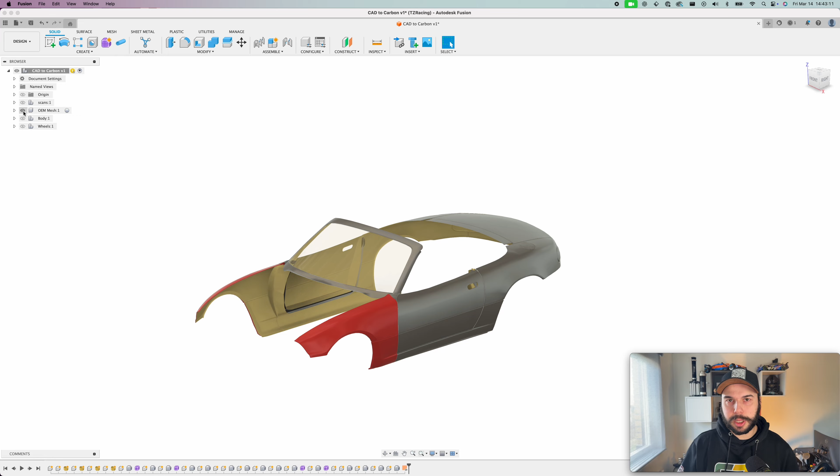But yes, the other option is you go out there and 3D scan yourself. We use a relatively budget scanner called an Einstar. It's honestly a great option if you're like us getting started and you don't have a big budget. You can still get very good scans, and it's a relatively affordable tool to have.

So we can see here I went out there and scanned the actual car, and we can validate against the model to see if everything fits. Here, for instance, I needed the cage to make sure that the fastback would fit when I modeled it, and that's when a generic 3D model you found online wouldn't be good enough. The cage in my car was custom built, so I needed the actual scan for my actual cage to make sure that it would fit.

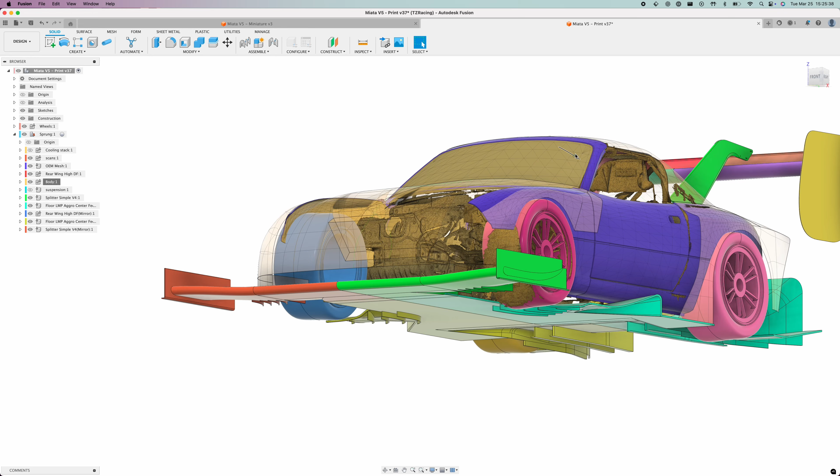So here you can see there's a little bit more in there than just the cage. It has the engine, it has the hood, and you can see that kind of lines up with the original scan, even though there isn't that much left of the car.

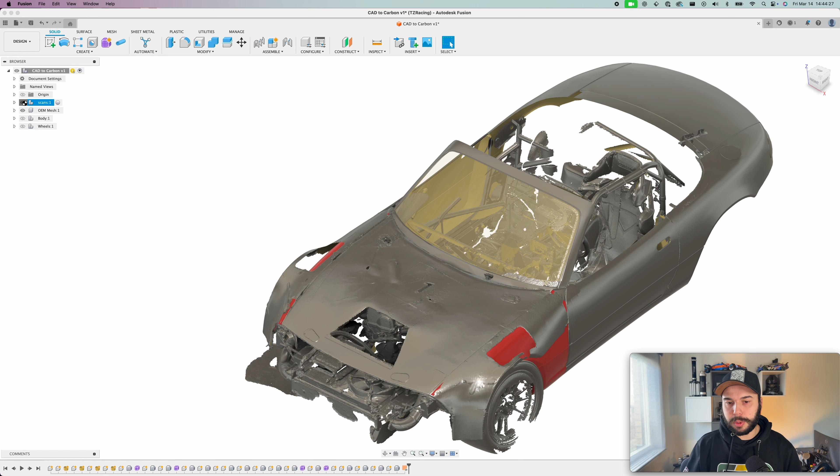But for today, for this exercise, we're actually just going to work with the model that I found online. We're going to be working on the rear fender, so we don't really need the cage or these other details. This scan was also a little bit too heavy - that's something to keep in mind. If you're scanning yourself, you might want to turn down the resolution if you don't really need that much, because it makes it more difficult to work in Fusion.

Let's hide that scan and just go back to the model that I found online. As a reference, I have some of the stuff that I had already modeled here, and you can see that this is the quarter panel that we're going to be working on.

Full disclosure, this isn't going to be a full comprehensive tutorial on how to do form modeling in Fusion. There are already great videos about that on YouTube, and I'm happy to link some of them below - that's how I learned it, and I can share the videos I found particularly useful. This is more of an overview of the end-to-end process with some tips and tricks for every step of the way, and we can obviously add more resources for each of the steps.

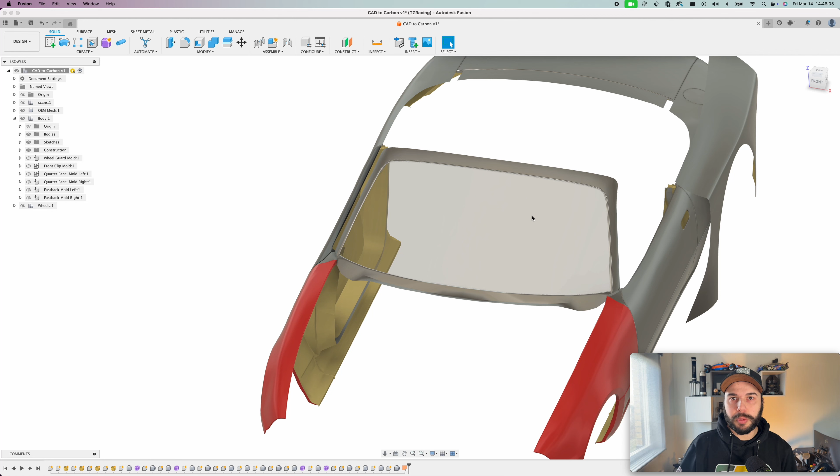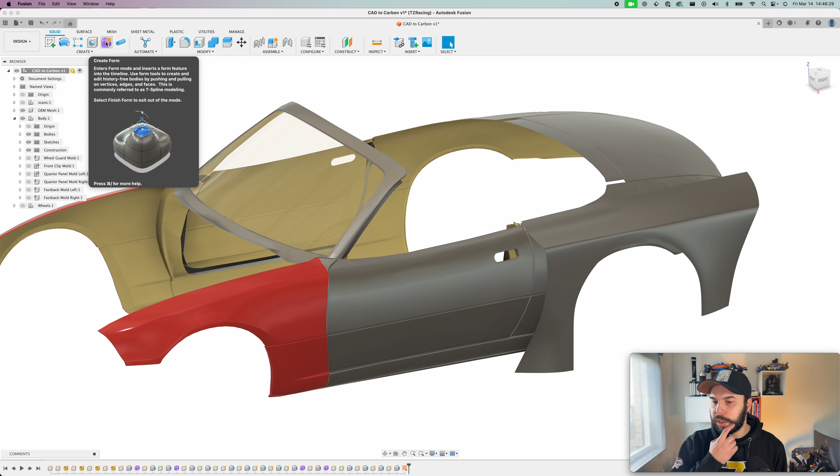So yes, this is the fender. We're gonna go and create, just give you kind of a starting point and some tips and tricks. So let's say we don't hide this for now, and we want to start a new version of the fender. So what we need to do is we need to go up here and use the form tool, and we need to click create form.

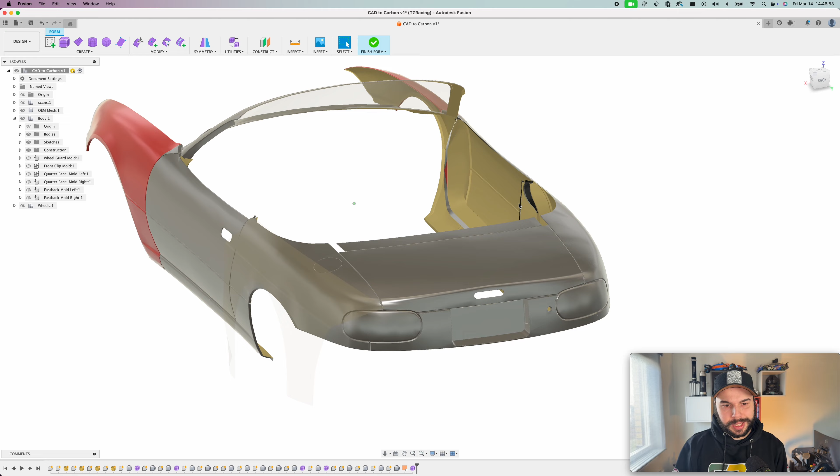But you're going to see what happens when we do that is the other fender just kind of vanishes. And that can be tricky if, let's say we're making another fender, we're making the fastback, and we wanted it to line perfectly with the fender. So that would be quite tricky, because even though we have kind of a shadow of it, it's very hard to see it properly. One trick for that is I'll just undo the new form.

Here we're working with the timeline mode in Fusion, which you can see every step here. If you haven't used it before, this is a great tool, especially if you're doing sketches. So let's say you model a plate and you make all the holes in that plate 6 millimeters. Then you go to the car and you realize that you actually need 8 millimeter holes, because whatever you're bolting to the car needs 8 millimeter bolts.

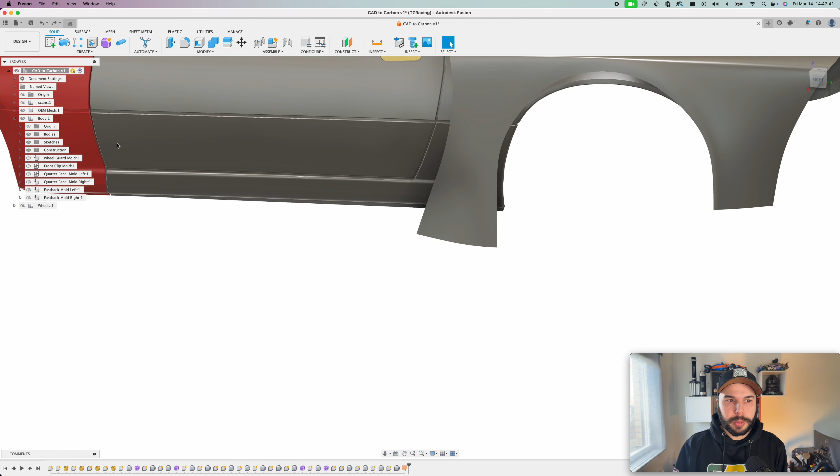So you can kind of roll back, edit your sketch, and it automatically reapplies everything else. So if you build other things based on that original sketch, things will just be updated to the new sizes. So that's awesome. But when you're working with forms, it's not always an advantage.

So personally, I find it easier to right click on the name of the project and then just click do not capture design history. It's going to tell you that you're going to lose your history, which is okay. So sometimes I'll have multiple files where I can kind of move things back and forth. So in one I have the design history, the other one I don't. So for this case, let's just delete it.

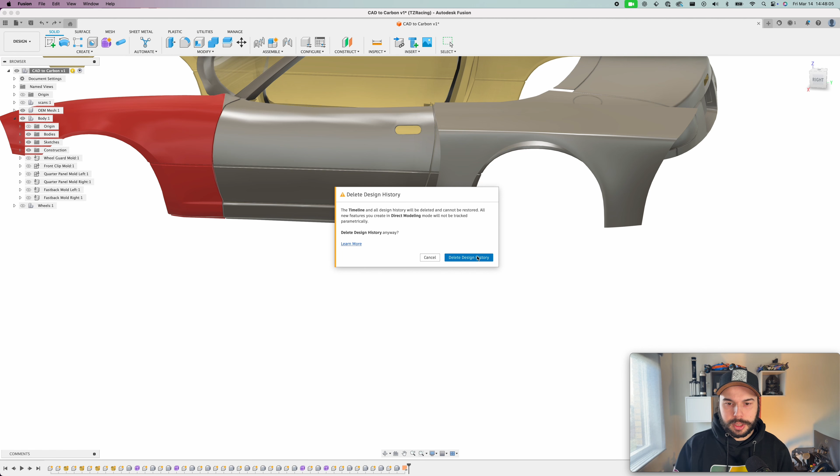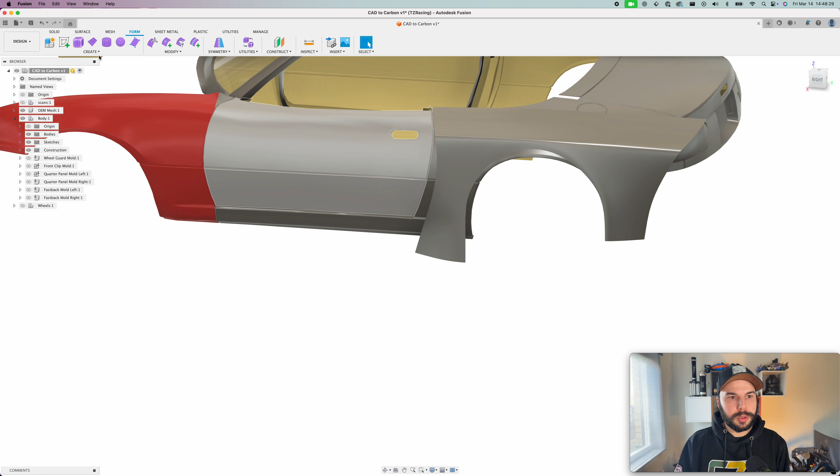And now you're going to see that we no longer have the create form button, but instead we just have the form tab, which allows us to use the form tools directly from the top level context. And here we can decide how we want to get started in our fender. And this one is obviously still visible. An easy way to start is with a cylinder.

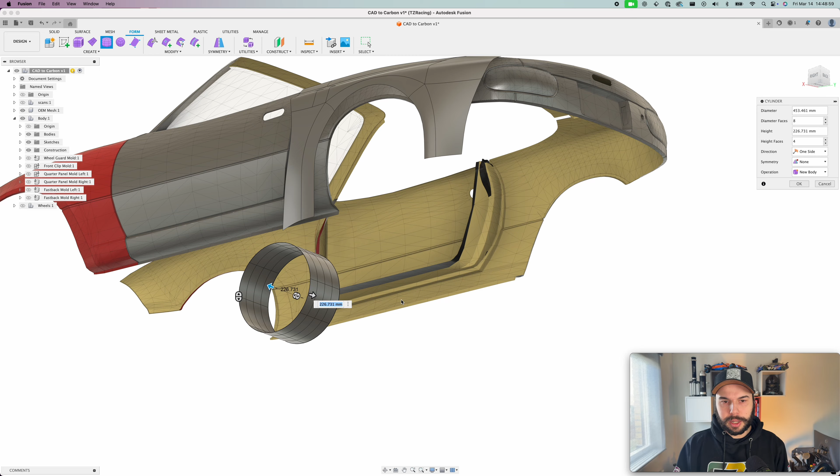So we can just go here and right click on the plane we want it to be, and then we just kind of make a circle. The size here doesn't really matter for now, and you can see that's created this cylinder. Oh wait, so right now I have the edges hidden, which is Ctrl 4. If you want to make them visible again, you just press Ctrl 6. So that helps. So we can see that now we have 4 divisions in that direction.

So we can just go here, make just 1, and we keep 8 in the other direction, which is fine. We can change the height, it doesn't really matter here. We can make like 100 or something like that. The diameter might be easier to start with the diameter of our tires plus some margin. So the tires that we're running are 650 diameter. It's a 280 by 650 slick.

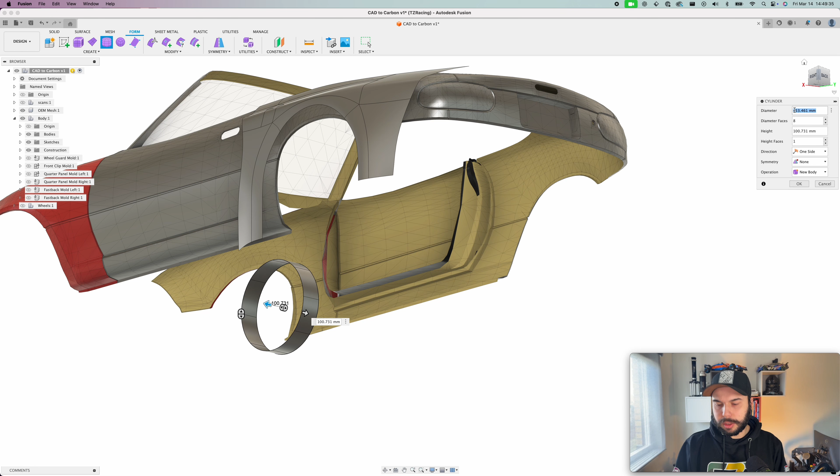So if we add, let's say, 1 inch, that's 25 mil in each direction. So the diameter is now going to be 700. So we can just make that. Cool. So here, if we want to work with forms, then we need to use the edit form button. So now we can just select it.

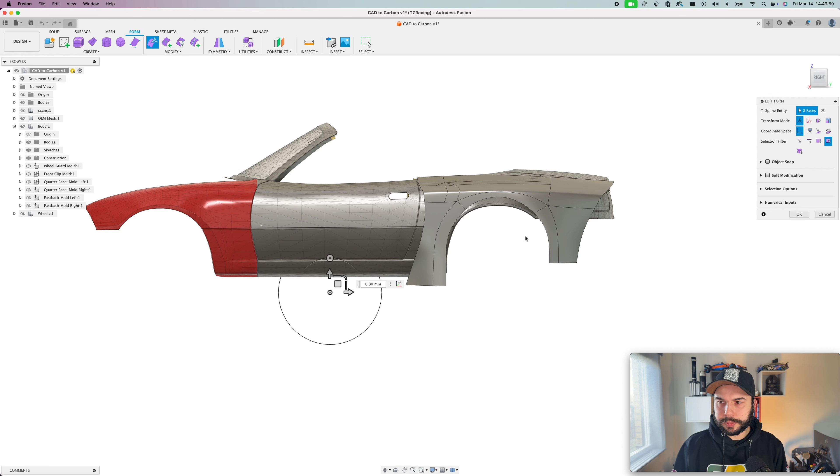If you double click on a face, you select that whole body, which is useful when you just want to drag things around. And I also find it easier to work with the planar face. So if you just click right there, and then you can drag it here, and it should be fairly close to the size that we already have. And then we can also look from the top and just move it back here.

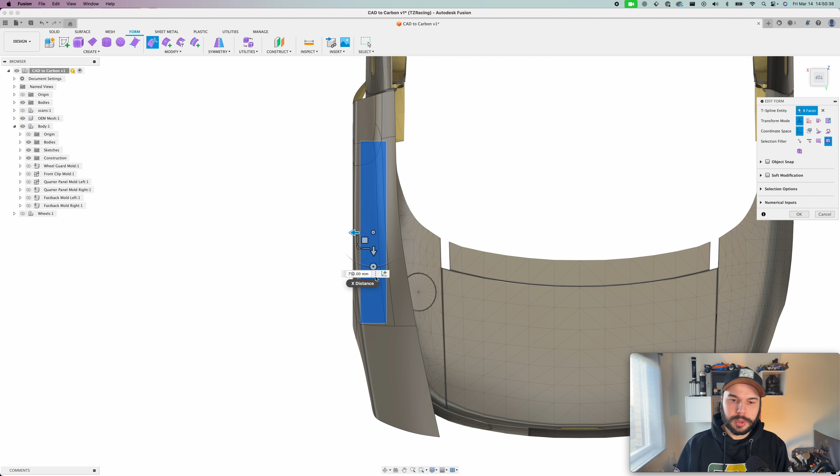One trick that I think is also helpful is to be very clear, like usually move when you're looking straight down or side, and then try and move it one direction at a time. You can also move 2, but depending on what you're doing, it might be easier to do 1 by 1. And Fusion will also move in steps, so you can just edit the number by hand until you're close enough to what you want. So here we are 780, that's close enough. Let's see.

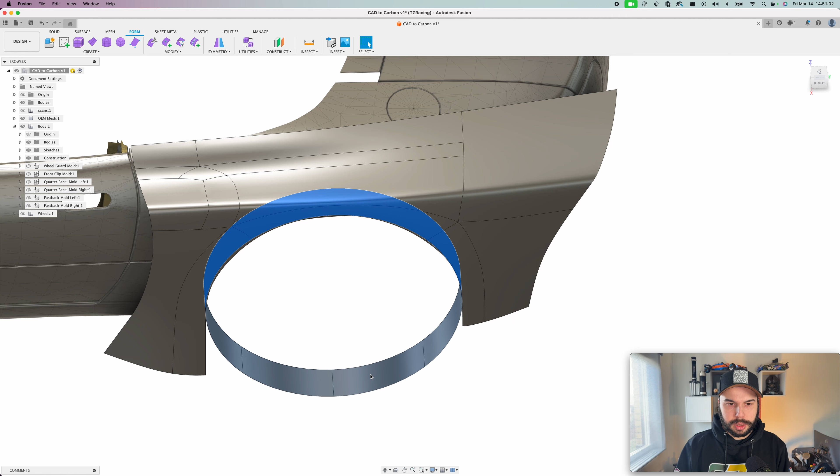Yeah, we didn't quite nail the position of the radius, so since it's still selected, we can just click edit form again, and here again it makes more sense to move in 2 planes, right? So here we'll be moving in Y and Z.

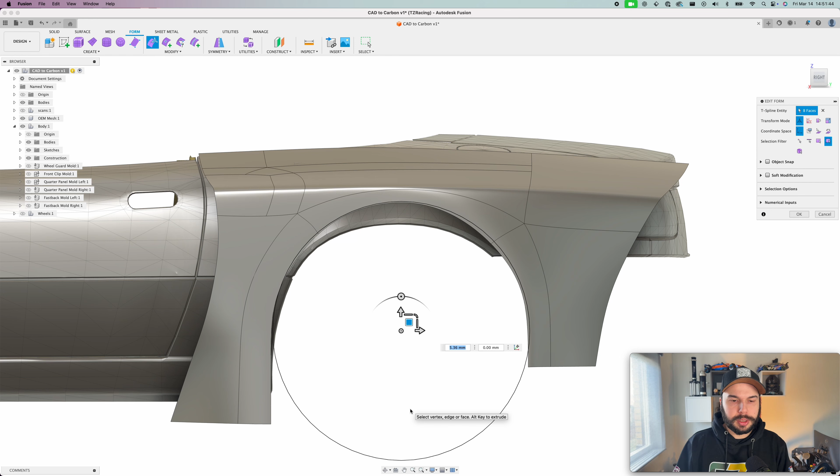Obviously we're not going to recreate the full fender, so it doesn't really matter. We can just put it in a place that looks close enough, and we can also see that the fender actually isn't fully round. The reason for that is when you have multiple panels, Fusion kind of pulls things around. We're going to look a little bit more in a second, but yeah, it's one of the small challenges that you're going to have to learn to deal with. But these are very small deviations, and it's not going to be noticeable with the full car.

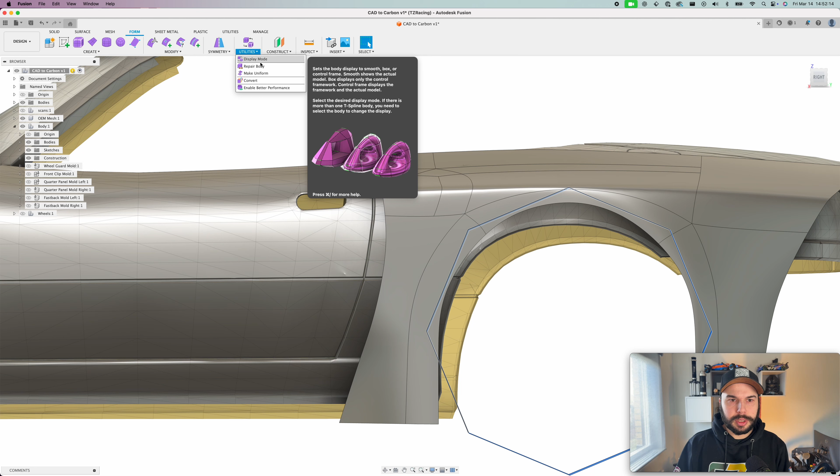So yeah, now you can see that this obviously is a circle, right? It's perfectly round. And that's what in Fusion, in the form tools, is called smooth display. We can also change it to box display. So you can press Ctrl+1 to go to box display, or you can go under utilities, display mode. And then here you can see this is box display, then you have control frame, and then finally you have the smooth display, which is what we were using before, or the shortcut is Ctrl+1, 2, and 3.

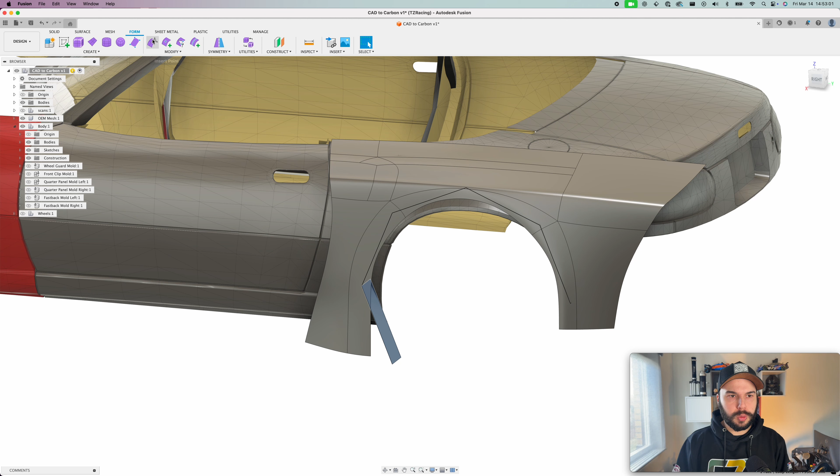So nice. Obviously our fenders are round. At some point they need to come straight down. So we can just go and delete some of these faces. So we can delete this one and this one. And yeah, let's delete this one too. Ooh. Here there's a couple ways to deal with that one. We can either delete it or we can leave it here and then just move those vertices. Yeah, so we can move these ones.

Another nice trick is you can move your anchor point, or your pivot, I guess. You can just go and move it to that edge there, or that vertex, and you press down, so that's where you want it. And then you can just change in this direction, and then you can set it to 0. You can scale to 0, so it's going to be perfectly vertical.

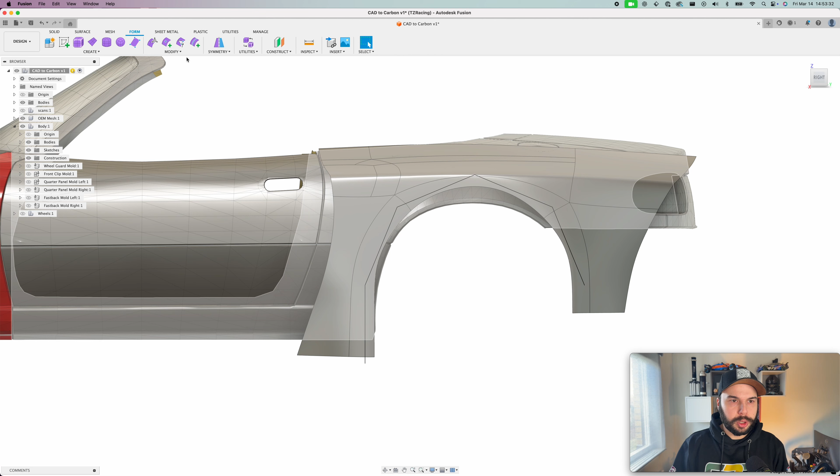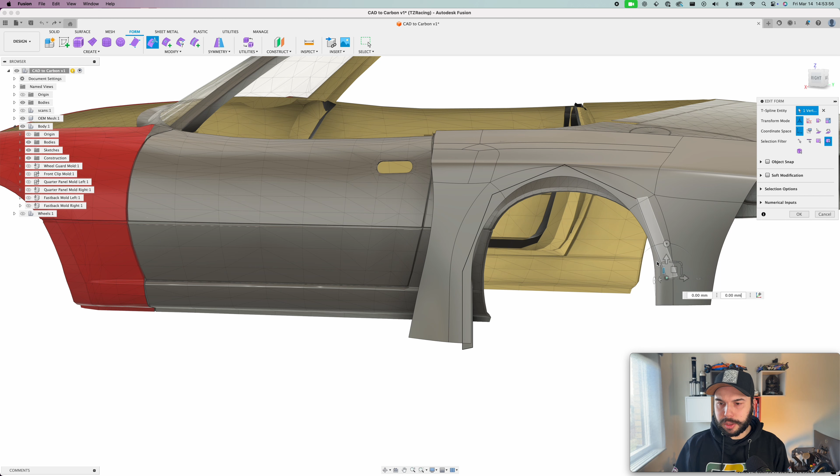Another way to do that, if we do the other side in a different way, you have to be careful because here we're selecting vertices. If you had just clicked here and then you look from the side, you're going to see that we selected only one. So if we start moving that up and down, we're just distorting it. So let's undo that. And then the easiest way to deal with that is if you just box select it.

Now we selected the whole edge and we can extrude it. So to extrude, if you want to just extend that down, not just move that point, you just hold Option on Mac. I think it's Alt on Windows. I'm not a Windows person, and just drag it straight down. So now you can see that what we did is we created a new face there. And we can go back to smooth display and see what it looks like after our changes.

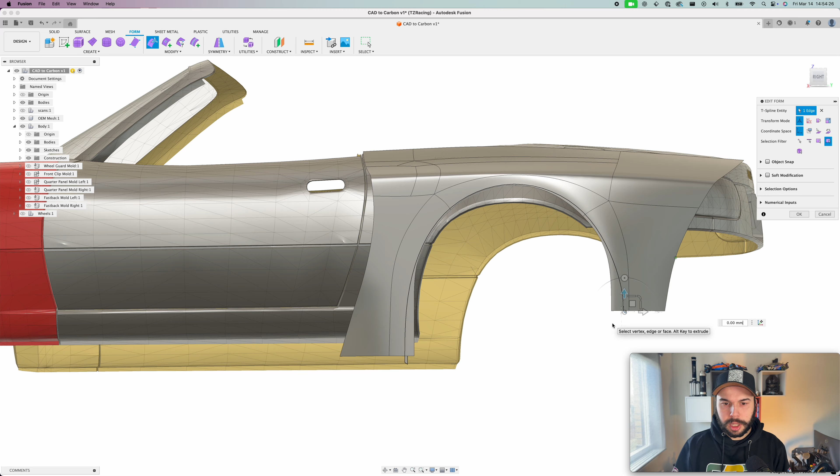So this is where things get a little bit tricky and why my fender isn't perfectly round. You can see that even though this is perfectly vertical, it's not exactly where we want. So we can just box select and move it back just a little bit. Again, it's moving too big of a step, so we can change it to 30. And when I'm doing these kind of big movements, I'll go back and forth between smooth display and box display, so I can see what it's going to look like.

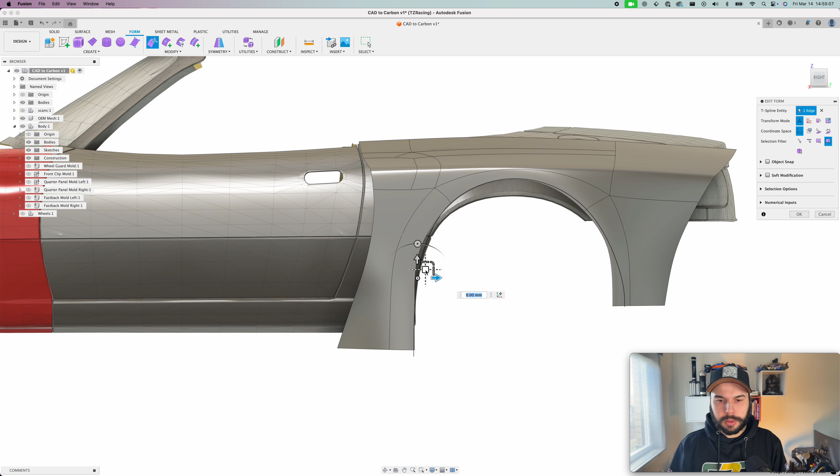So here we can see that it kind of brought that corner in too far. So we can just go here and drag it down a little bit. I usually just go back to box display and try and move only in one direction. Yeah, so you see that you're not going too far from the shape you want. So this looks not great, but good enough for demo purposes.

We can do the same thing on the other side. Just drag it here. Let's say just 30. That should be good enough. And then, yeah, this edge here. Selected nothing. Just drag it up a little bit.

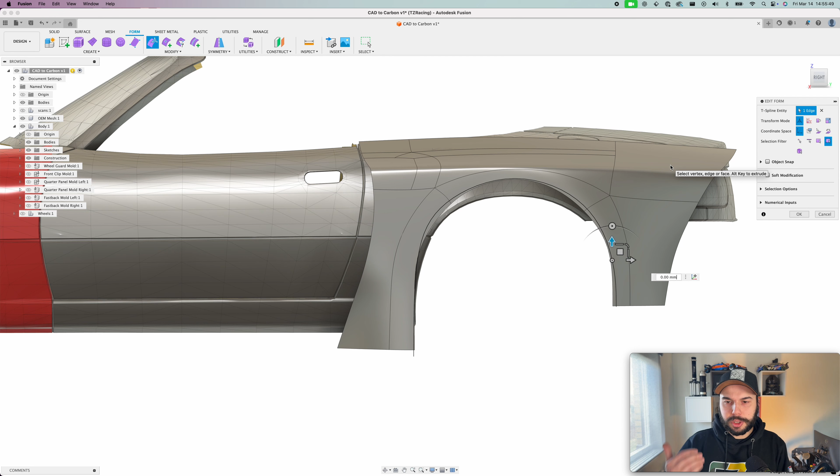Cool. Again, not perfect by any means, but it is good enough to just show the process. So we press enter. I'll hide the original fender now. I feel like we've used it for what we needed. If you press V for visible, you can just toggle things on and off. And you can kind of see how much we're gonna have to cut off the original fender, and that's before the tire even moved.

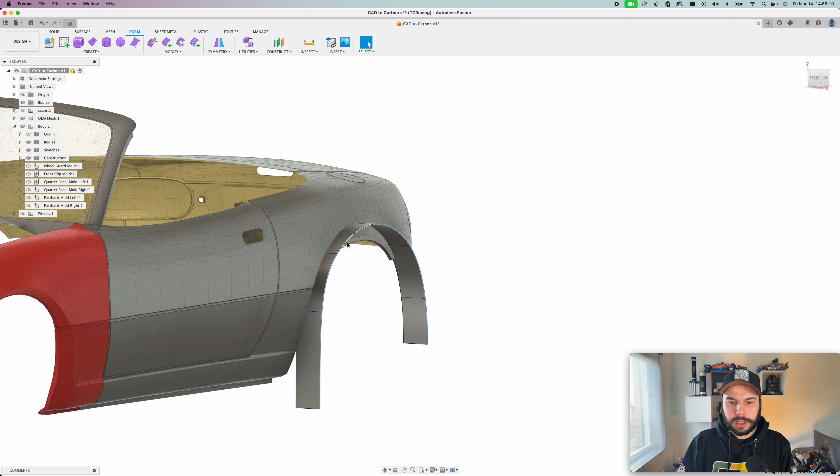But cool. So now what do we do next? This is just the sort of arch. So it's not even the liner, but it's kind of similar to the liner. But if we want to actually move into making the fender, we need to extend the outside. So we're making the outside skin. An easy way to start with that is if you just select that whole edge loop, and then you hold Option again for extruding, or you can do Command and Option. I guess on Windows it's maybe Control and Alt,

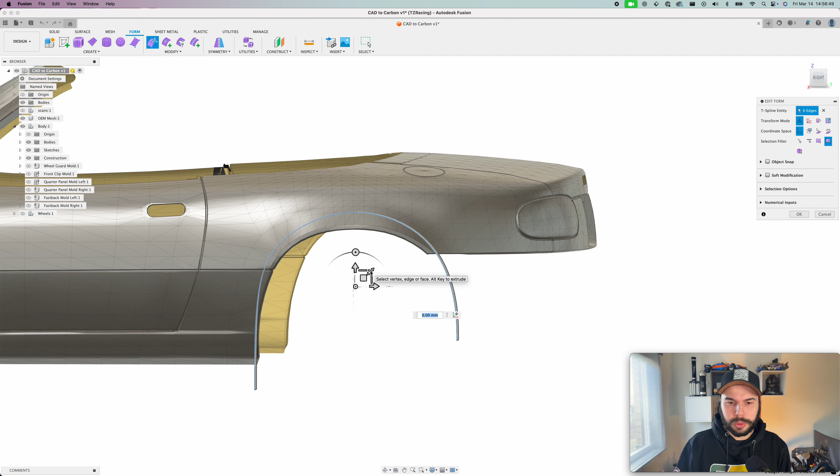and then you use the scale, the planar scale, and basically what you're doing is just creating a face outward. Of course, you're going to have to adjust those edges. They kind of just went further down. But yeah, it gives us a decent starting point, and we can also see again in box display. Maybe that's a bit too much, so we can just bring it back down a little. So let's say that this is decent, and let's go from here.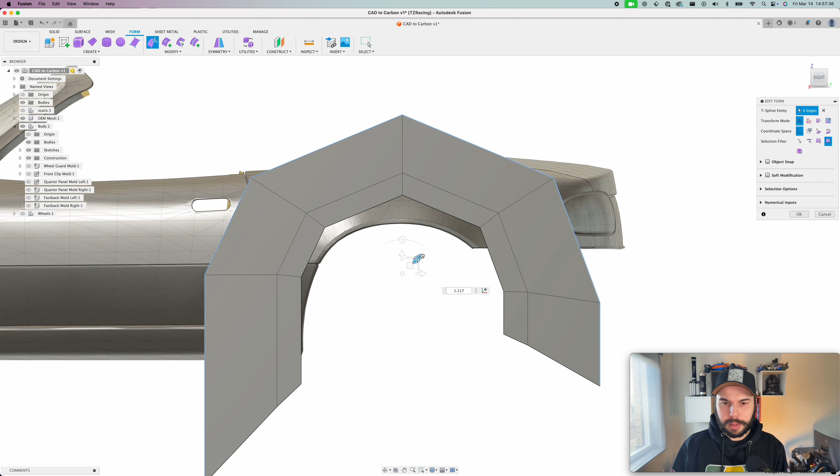And now we'll have to do that again, but this time I'm not gonna use Command, so I'm not gonna crease the edge. So when you crease, you get a hard line. When you don't crease, then when you go to smooth display, that's gonna be a soft line. So here you can see how this was creased, so it's a sharp 90 degrees. But now if we move this edge, we kind of get this rounded look.

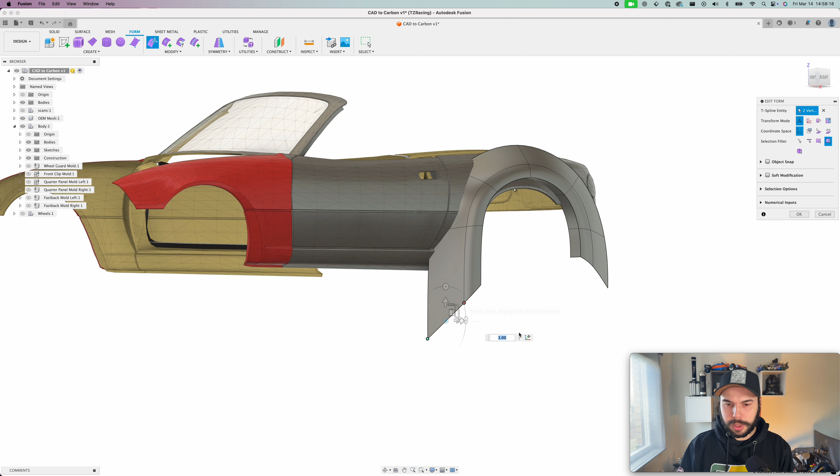So this kind of looks a little bit like a fender flare. So maybe that's actually a better idea, just make it look a little bit more like a fender flare for the purpose of this video, instead of trying to make the entire fender. So yeah, let's keep going. So here we can select these two edges, and again we can change the pivot to here, and we say down, and then we can scale horizontally to that point to 0, and now we get a straight line, and we can repeat that on the other side.

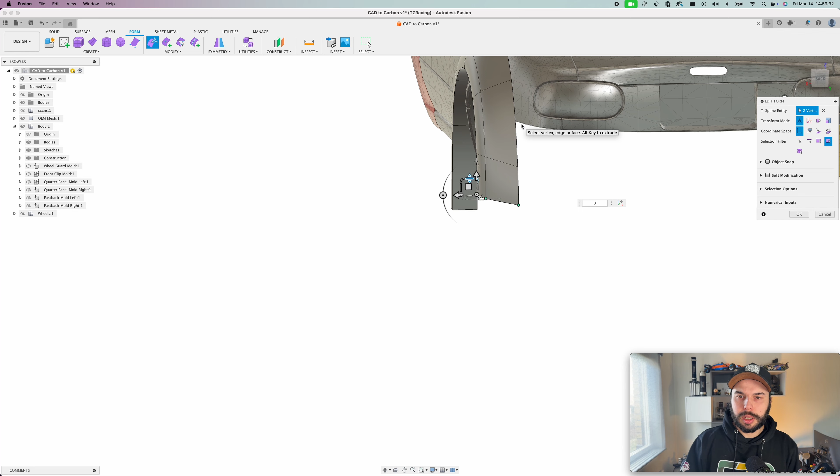Cool. So now, this is just done by eye. There's no way, because this is a mesh, like when you scan you get a mesh. This is sort of a native object, if you will. I forgot the actual name of the representation. I should have mentioned that at the beginning.

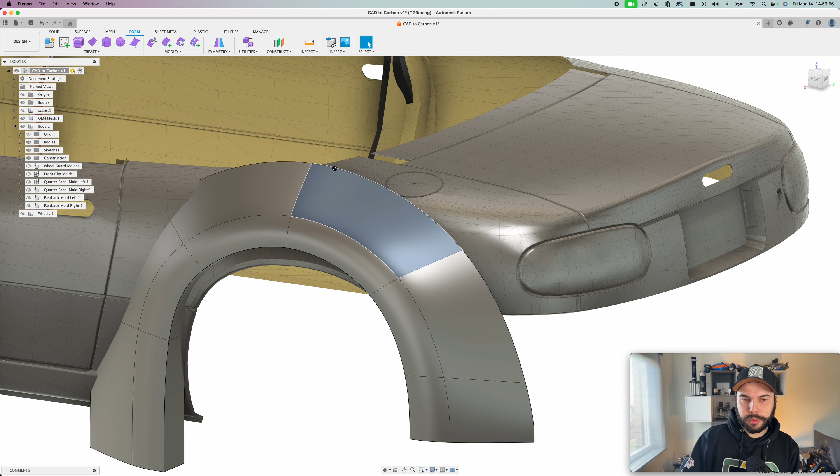I'm not an engineer. I don't work with this for a living. I'm not a CAD engineer. I just started learning on my own time because I wanted to modify my car. But for what it's worth, I feel I might as well share some tips with you guys if you're just getting started.

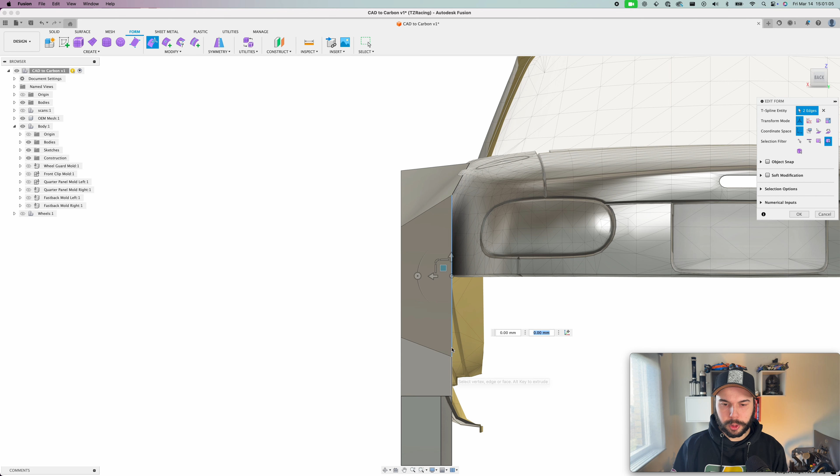Now, if you want to make these fit right, you just have to do it by eye. As I mentioned, this is a mesh, so you can't use one to subtract from the other or just say cut it there. So you kind of have to drag it and visually make sure that it's as close as you can get to the body. So you just drag it and see what it's looking like. Usually you start with a very coarse form, so as few edges as you can. That's easier to manage, and then as you move along you can add more refinement.

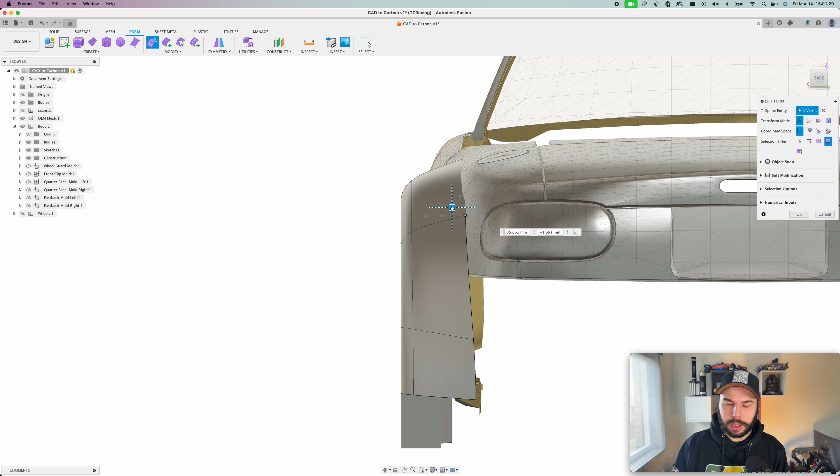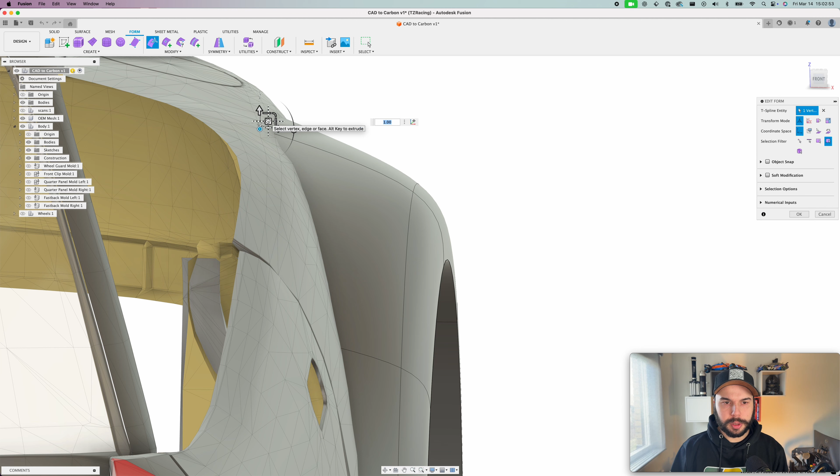So obviously to match the curvature of the car, you're not going to be able to do it with just this small amount of vertices. You're going to have to add more here, so you can pull it in. I can demo that quickly. First, we'll have to go edge by edge and make sure that it's as close to the surface as possible. Now, usually I would do that once I'm happy with the overall shape. I'm just cutting a little bit of a corner here, and usually you're going to want to do that in smooth display, so you see what the final piece is going to look like. So this is close enough.

You can see how the lines are fairly close, and then you do it on the other vertex here. Yeah, so you select that, and then you can drag it until you just see it poking out like that. Now you're gonna see a problem, right? In the middle here, it's inside the body, but both of those points are already sticking out a little bit. So how do we fix that? And that's where you need to start refining your form. That's usually towards the end, as I mentioned. You don't want to have too many vertices or too many edges, too much geometry to work with at the beginning.

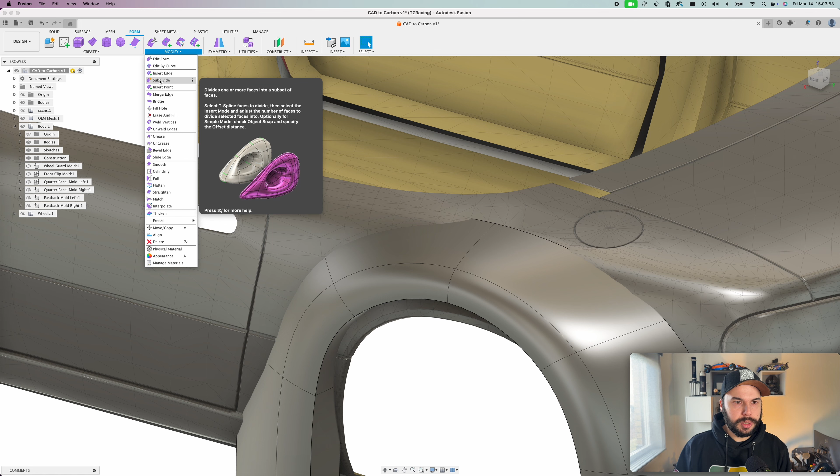So here we have to go to modify, and there's a few ways to do it, but in this case I think this is going to be insert edge. And then you can double click an edge to select the entire edge loop, and here you can give it a value, which is a distance. It's a fraction of the distance between the edge and the next one where it's going to be inserted. So you can change between positive and negative values to decide which direction you go.

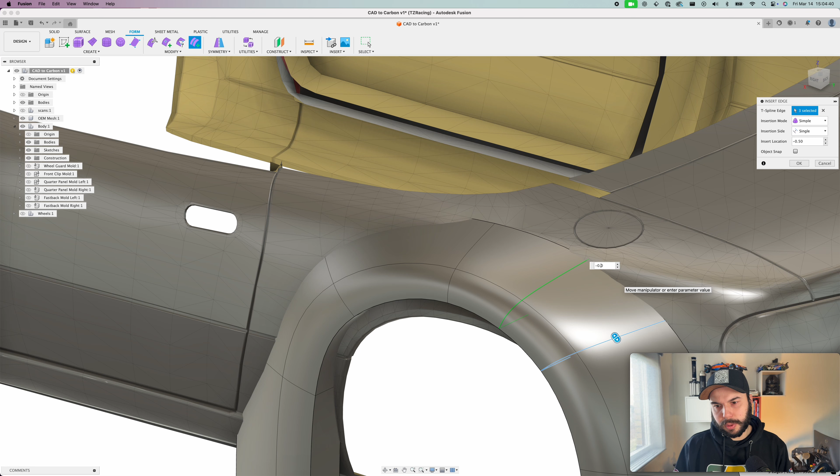And here you can see that towards the side, towards the other edge, we can see the whole edge here. And here it's very close to this vertex, it already vanishes. So it might be better to keep this edge closer to this one. And that's going to impose some challenges that we're going to see very soon. So let's say we press enter. Now you can see it completely changed the shape.

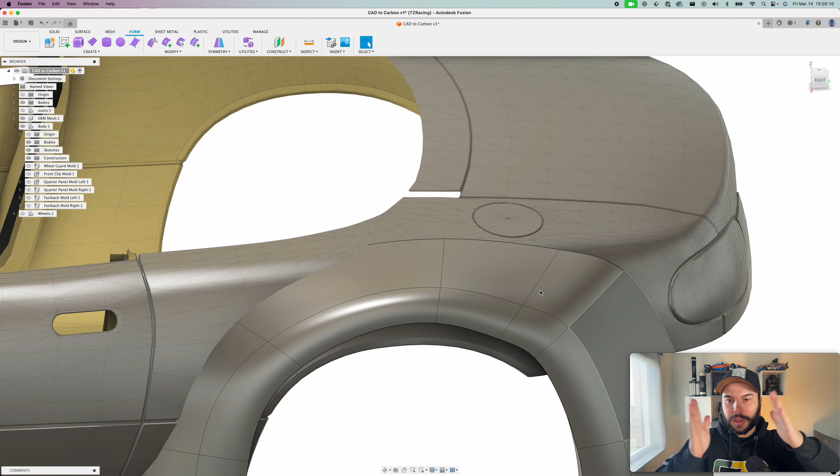And that's just how forms work in Fusion. Big panels kind of pull on the other ones, and if you have edges too far from each other, those can be deformed more easily. When you have edges very close to each other, they tend to pull the form. So there's a few ways to deal with it.

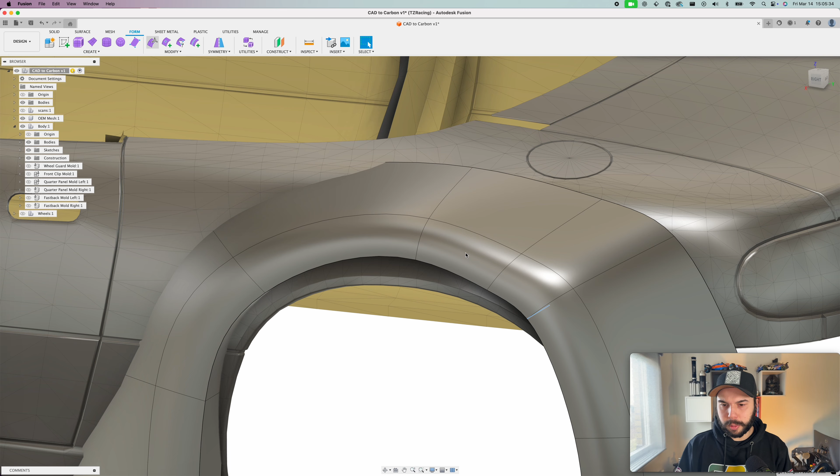You can add more edges all around, or, like in this case, we need these two vertices to be close to each other, but these two don't really need to be close to each other. So you could just select this one and move it. So we can go here, edit form, and move it around. For some reason I can't click there, but for now I'll just kind of have a look at it and move it around.

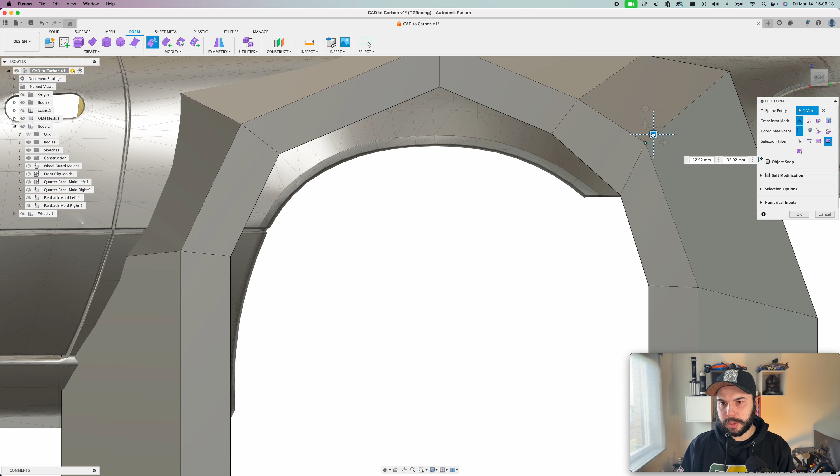This is closer than before, it's not great, but it's a little bit better. And then we can do the same thing, again, move back and forth between box display and smooth display, so you can see what you're doing. And similar here, this is a bit of a weird shape, and that's where you have to go back and forth and see what works. You might have to move these edges as well, but I don't want this to be a 10-hour long video, so I'm just going to stop here and show you the next step.

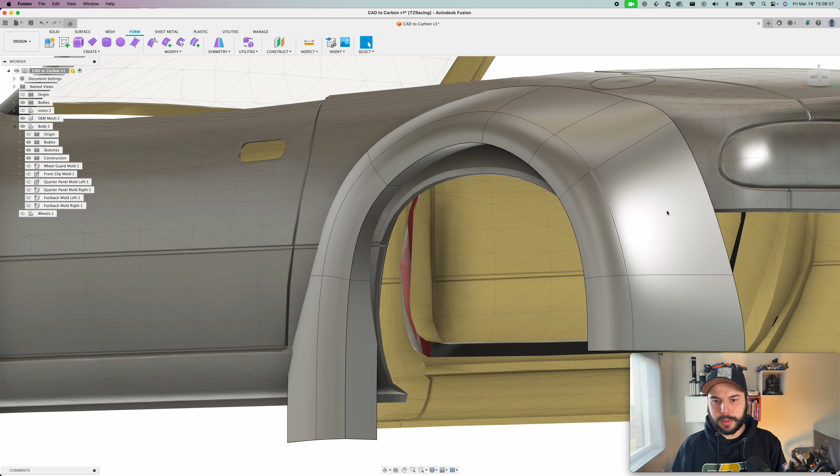So let's just pretend for a second we're happy with this shape. We can hide our mesh here, and we can just focus on this fender. So let's pretend that this is good enough, even though I know it isn't. We don't need these usually, so we can delete these. And the first thing that we're gonna need to do is to thicken it. Right now this is just a surface, so it has no thickness. It's not a volume, it's just a shape. So if we want to print it, we need to print something that has volume.

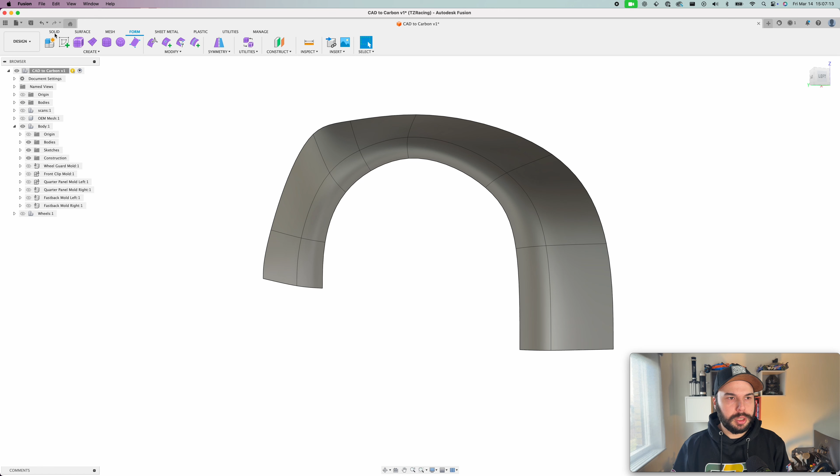So we need to go back to solid, create, and thicken. Here we'll select the form that we want to thicken. It also works with surfaces, and then we choose the direction. So let's say we want to make it 10mm thick, which is what we've been using lately, and you can see here that it's thickening inwards, and that's going to depend on what face you want to be accurate. So if you're doing a positive mold, if you're just laying the carbon outside, then that's going to be okay. Or if you're just skinning it and keeping the print, this is also going to be okay. That's what we did last time, and it works okay.

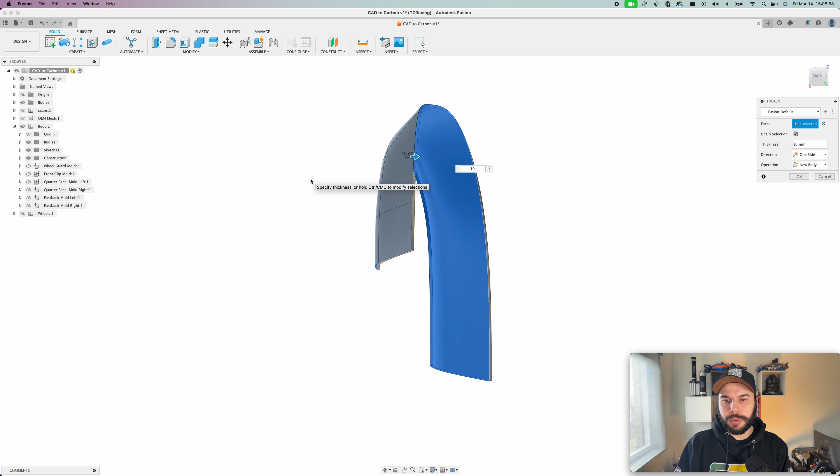It has some drawbacks, which we're going to cover in the next video. We're going to show you the before and after panels. But for now, what we started doing recently is printing the negative forms. So we're printing the mold directly. So in that case, we want to extend outwards. Now this can take a second if it's a very complex shape, and it can also fail sometimes. You have to tweak the shape, especially when it thickens, if one part overlaps with another, that's a problem.

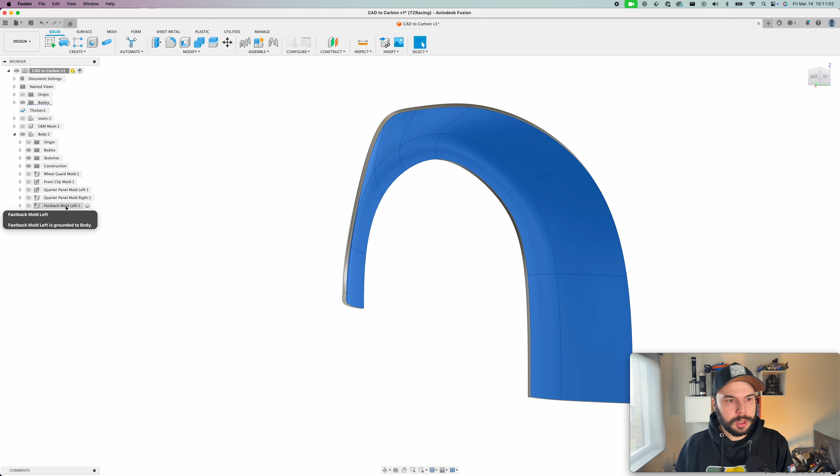So here, if we go to bodies, we still have the surface visible, and now we have the body itself. And again, let's pretend this is good enough. This is what I want to print. Now you're gonna have a small problem, which is this part is very big. There's multiple ways to measure in Fusion. One way is just select 2 points, and then the measurement is going to show on the bottom right, but you're not going to be able to see it because I'm standing there.

So the other option is just go to inspect, and then point 1 is already selected. We select point 2, and now we get the distance, which is 1.3 meters. Maybe some of you will have a printer that big, but my printer is only 256 cubed, 256 millimeters. So we need to divide this into multiple parts. There's more than one way to do it.

Of course, like anything else, you can just load it into your slicer and cut it there. I find that a little bit difficult and time consuming. There's also a software that can do that automatically for you called Luban. We tried that in our latest print, but we haven't assembled it yet to be able to actually say if I recommend it or not. But I've seen other people using it.

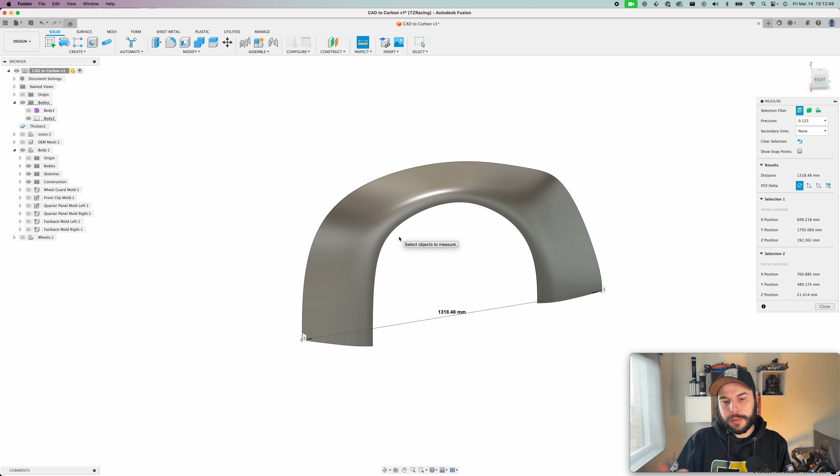But the way that we have been doing it, until we just tried Luban for the first time, is you just go here and make a sketch. It doesn't really matter the depth. So I draw a vertical line here, and make sure that you cover the whole part. It doesn't really matter for the cutting itself, but it's easier to visualize what you're actually doing. And then I make a horizontal line so I can cut in the other direction.

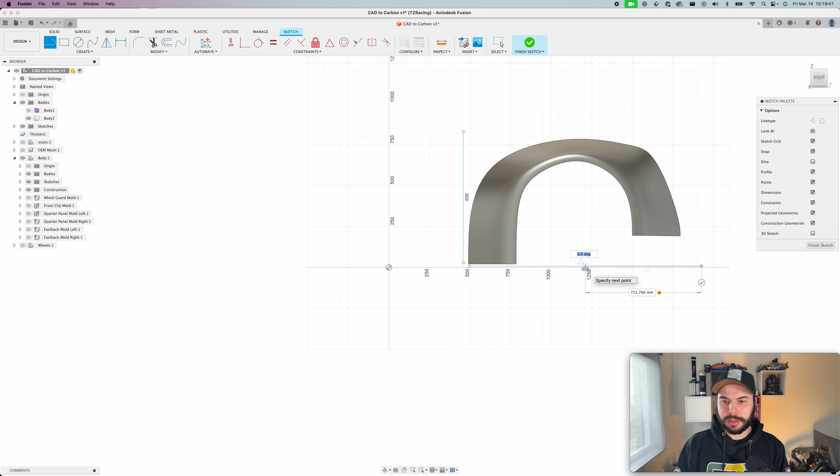Nice. You can see that this constraint here means that it's fully horizontal or fully vertical, and that should be good enough. Then I just drag it close by hand. It's not critical how close you are, but I just get as close as possible without actually going over the part. And then we can create a rectangular pattern, and we can use it to replicate this line in 2 directions. I prefer to select one at a time. So here, just this line, and then you can just drag it out.

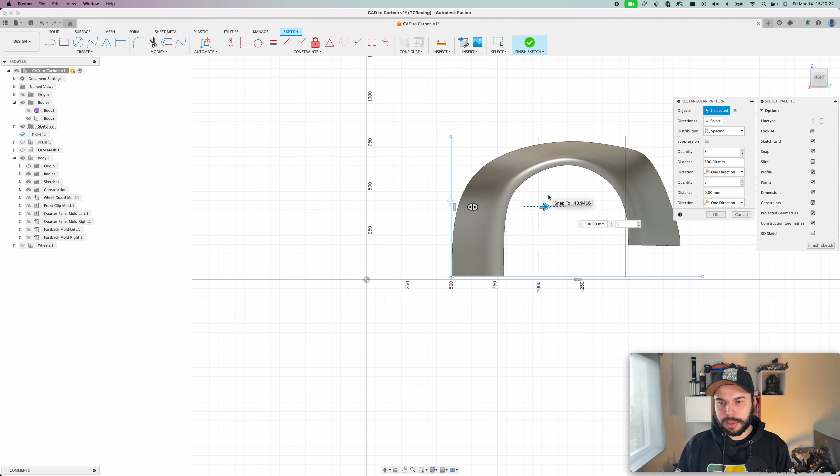And here you can either choose extent or spacing. I find spacing easier, which means that when you change the distance here, it's the distance between each line. And this is gonna be roughly the size of your printer. So you might be tempted to put 256, since my printer is 256. But since it's a 3D part, it might be curved in ways that you didn't think about. It might end up not fitting, or sometimes it will fit, but just about, and then you can only print one piece at a time, which might not be what you want. We're going to talk about that a little bit later when we cover the 3D printing.

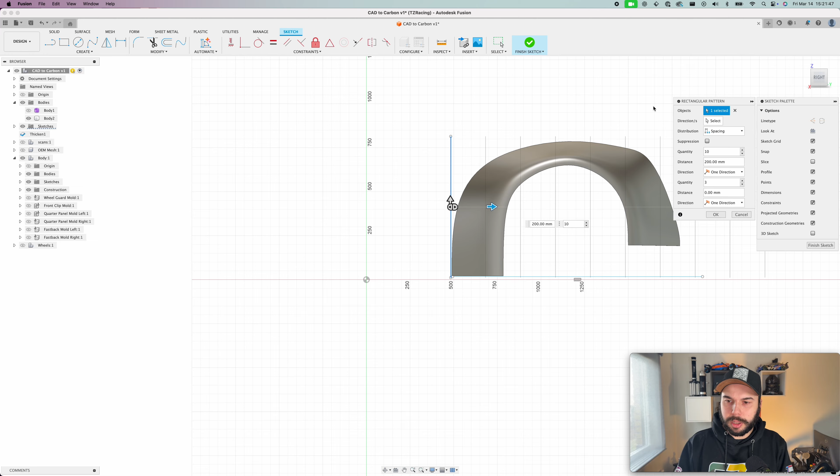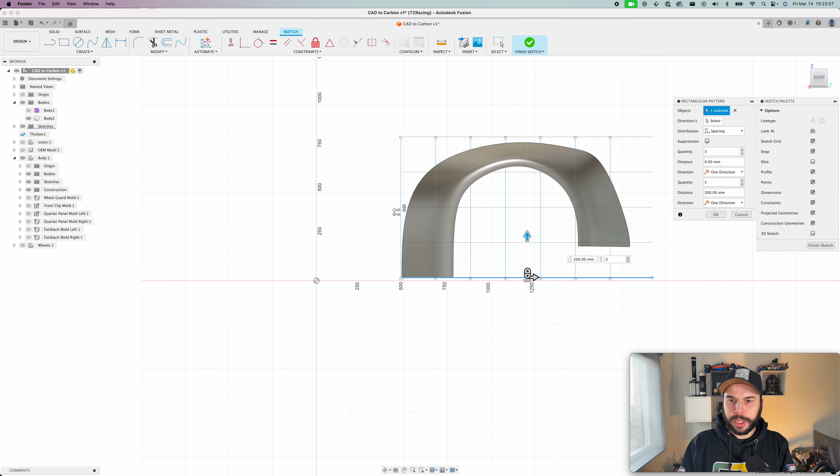And then here, just however many parts you need to cover the whole body. So let's say 10, or that's a bit wasteful. We can do 8 or 7. Let's say 7. Cool. Now I can do the same thing in the other direction. Just create a rectangular pattern, select the other line, same thing, just drag it. I'm going to stick with 200. That worked well for us recently. And then however many you need. 5. Good enough. Cool. Now we're done with the sketch.

We hit finish sketch. And then we're going to split body. You cannot split with intersecting lines. So here we can't split with all of them at once, but we can split with all the lines in one direction. So here we can select 1, 2, 3.

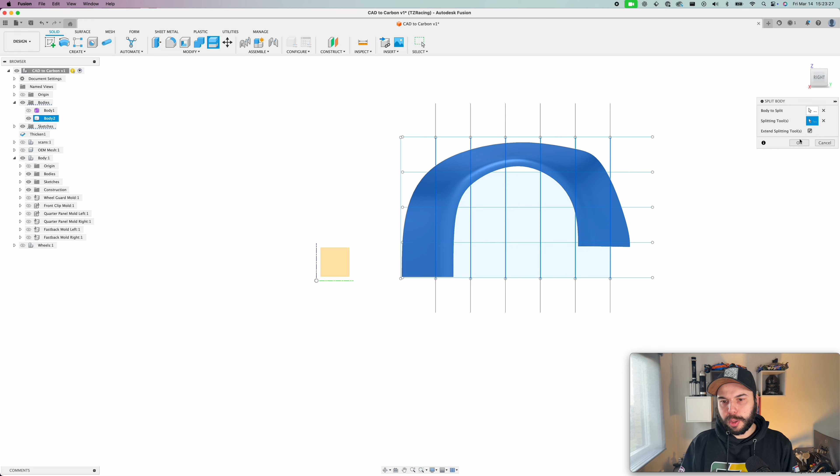And then you hit OK, and that's done. You can see now that was cut by those lines, and now instead of 1 body we have 7.

Next up we need to select all of these bodies. You can either select them one by one, or shift select to select all of them. And of course I missed that one.

Then we go into splitting tools, and select all the lines in the other direction. So 1, 2, 3. Do we need 4? Nope, but it doesn't really matter. Now we actually have decent sized parts that we can just send to our slicer and print.

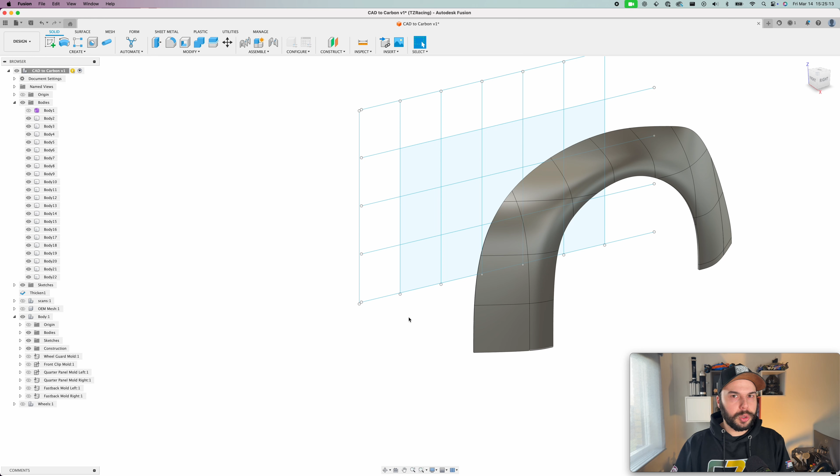I'm going to show you real quick the actual fender that we're going to be printing for the car. Here's the actual quarter panel we're going to be printing. You can see I did some of the things I mentioned, where I added the flanges, and then I added some nice chamfers so we can release the part.

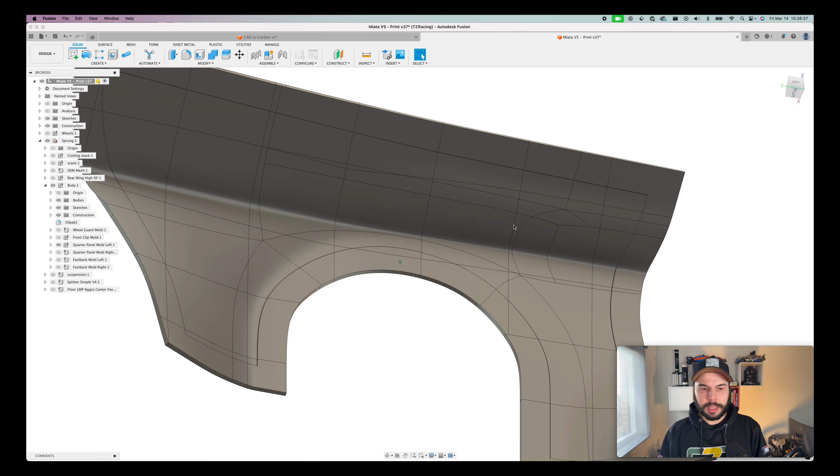If you want to see how I did that stuff, drop a comment and I can make another video about that. But now Reese has actually been managing our print farm down in Burgos, so I usually just send him this file, and he takes over from here.

So after Zagallo has finished everything he needs to in Fusion, he shares the file over to me. Once I've got the file, I start to disassemble the model into individual meshes that then go into Bambu. I'll show you the whole process of how I do that now.

So now that we're inside Fusion, we first start off by creating a new component to work with. The new component is basically just a new folder system inside of the Fusion project you're working on. There's tons of videos of file structures on YouTube, so if you need more education, go check those out.

But for this component, I always just call it printed. From there, it'll always select the one you've just gone into, so I need to make sure I select the main component once again. Then from here, I'll basically go through and find the piece that I need to export.

Save as mesh. The good thing with Fusion is it has this preparation type print utility, and when you select that, you can then select the application. For us that's obviously Bambu. You can use Cura, Preform, or a custom one, whatever you want. Always make sure you're exporting in STL, and in millimeters for us for the most part.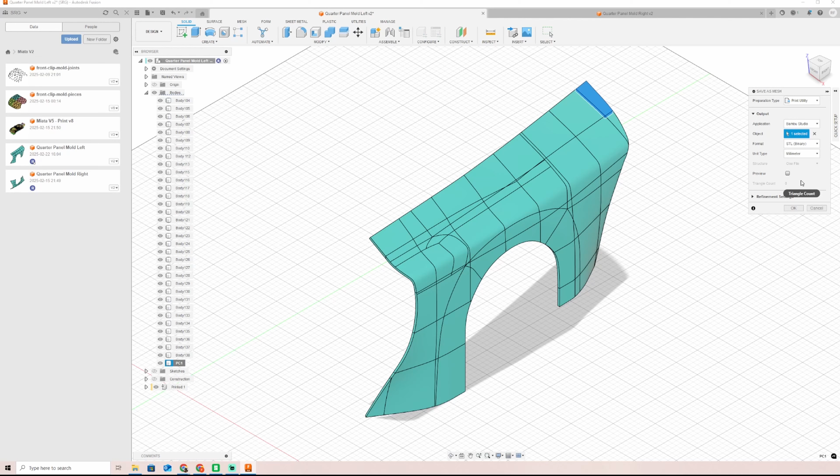From there, it's going to automatically open Bambu. The piece will then import, and we auto orientate where it needs to go. This is a bit of a slow process, but I tend to manually align wherever I want them on the build plate, just so I can fit as many as possible.

And that's number one. Then we go back here, and I'll move piece one into the printed section, so I know I've already exported it. You can see the color has changed - that's a nice visual indicator that it's moved. If it's not like that, if it shows as a single color, you can press Shift N and that'll separate it into the different component colors.

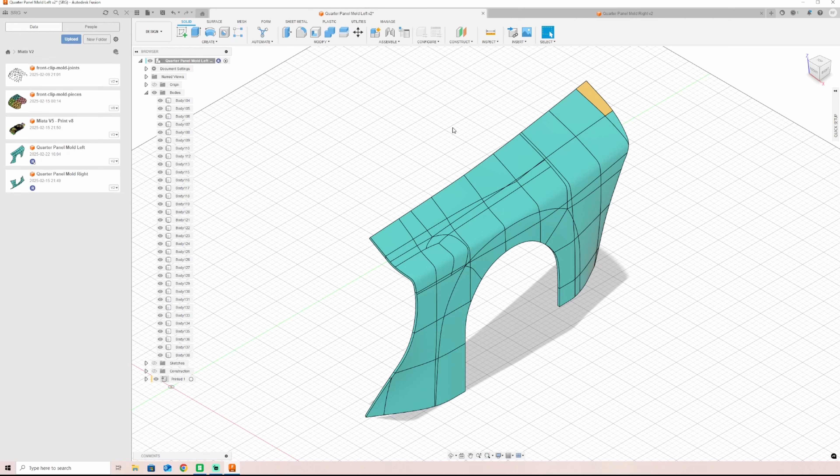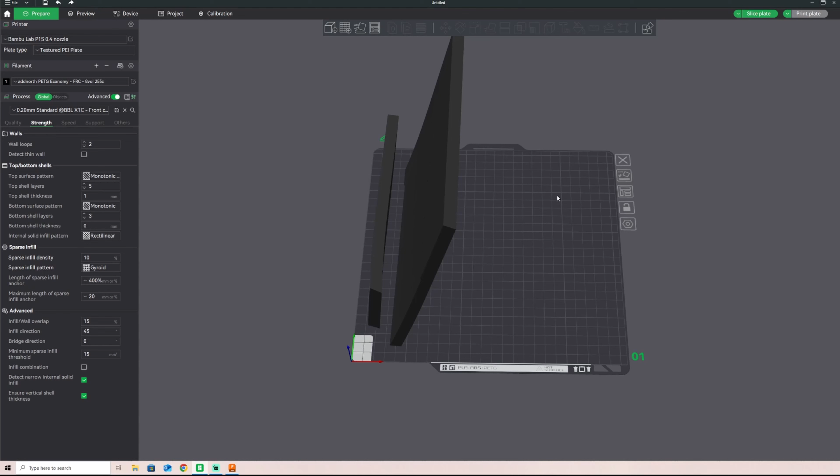After that, we move on to the next piece, save as mesh, and that's it. The whole process from then on is just to go through each of these, line everything up the way you want. My tip is I'll label piece 1, piece 2, 3, 4, 5, etc., so once I take it off the build plate, I can see clearly which number each piece is.

We then name all of the build plates according to what pieces are on board, so I can see from the print name on the printer themselves which is which. And after that, we're pretty much good to send it to the printer.

So once you've gone through and exported everything from Fusion into Bambu, this is basically what you'll be left with. We've been quite lucky - because we're using addnorth filament, they actually have a preset profile on their website that you can download and use.

So we've been using that. We've messed around a little bit with the temperature because that was a little bit off for us. So we wanted to try and match our print quality between the X1C and also the P1Ss. Basically, to try and save a little bit of time, our print settings are pretty much the standard Bambu Lab ones.

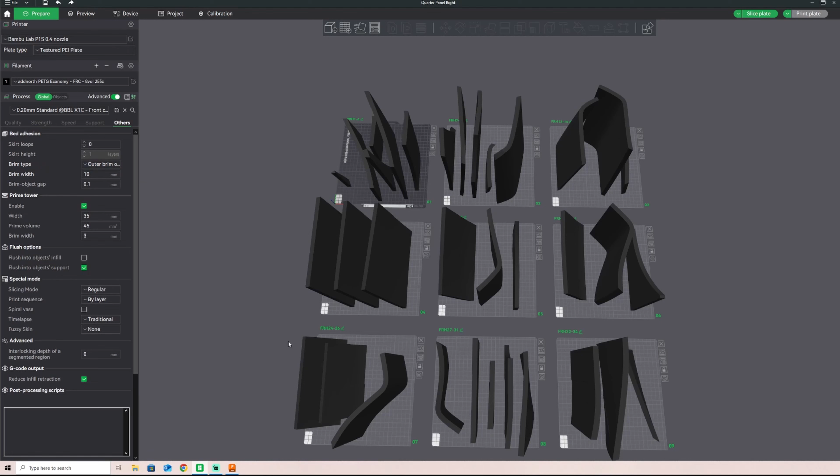But we go down to 10% infill and also a gyroid infill pattern. For the most part, we will also try and add a brim, either 5 or 10 mil thick, just because these are very skinny pieces and very tall. We did have, unfortunately, a couple of failures during printing from them falling over, which is why we've now implemented the brim on the rest of the pieces.

So now that we've finished all of this up, we can go ahead and slice the plate and send it over to whichever printer we like. All of our printers are unfortunately busy right now, but when they're free, we can send it over.

Next up, we head across to the print farm. We've been very lucky, we've partnered with addnorth for this project. We've picked up 60 kilos of their PETG Economy, all in white. As you can probably see, we've already been printing for about a week now. We've got 70 something pieces here, which is the front clip, and we've also finished up printing the fender. So that's what we're going to continue with right now.

Printer 2 is just finished up, but we're going to load up a fresh roll of filament into printer 3, and that's the machine we're going to kick off the next print in.

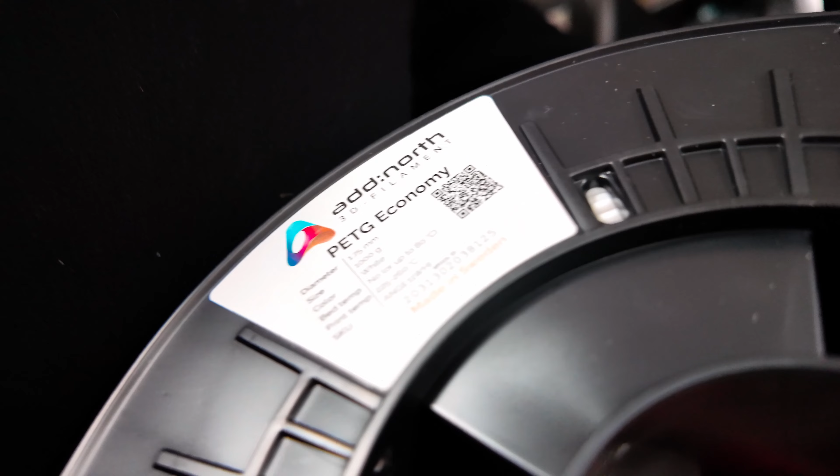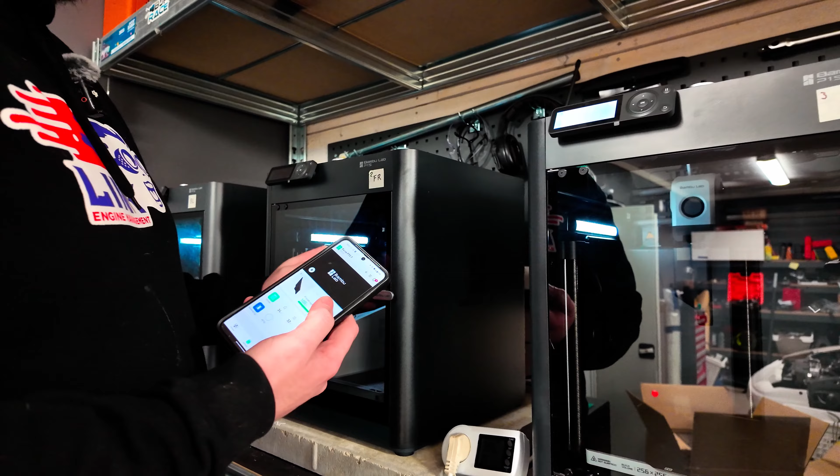So the great thing with the Bambu Labs is we also have the handy app, so I can see that printer 2 is finished up, I get a notification, and then I can also see that this is piece number 63.

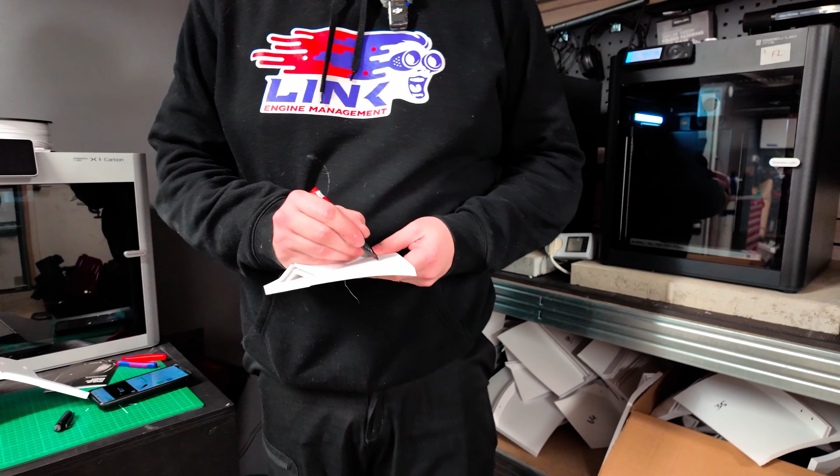On to the next print. This was the last piece we needed for the rear quarter panel. So now we just do a little bit of cleanup from the brims.

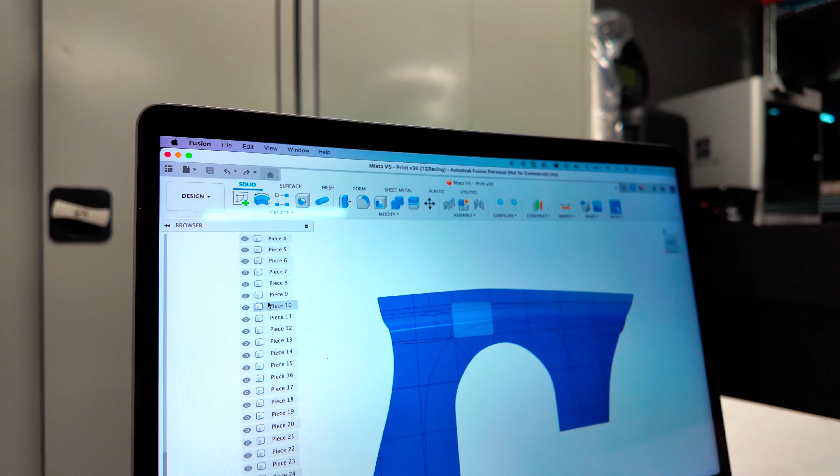And now it's time for assembly. So now that we've printed every part, all of them have a number that matches our CAD design here in Fusion. So we just go through each one of them, see where they should be, and lay them out on the table in the right place.

And while we are at it, we just clean all the brims as well and get it ready. Let's do it.

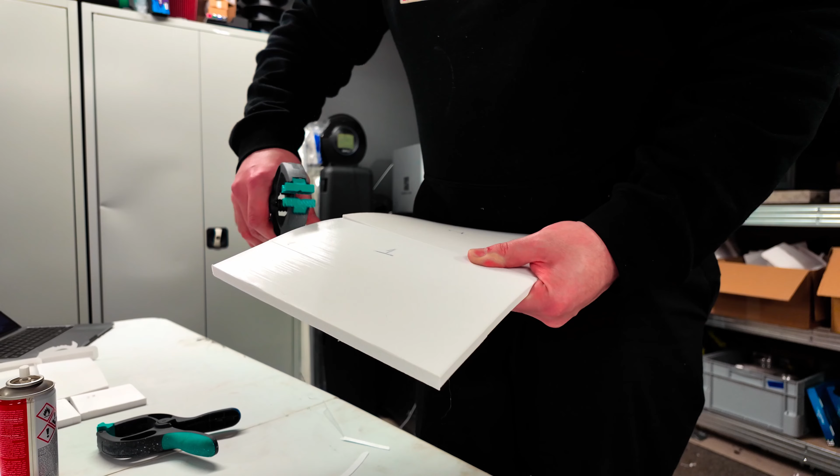So we've got all the pieces laid out now. We still need to do a little bit of cleaning up from all the old brims from the print. But basically the system that we're going to use is just a couple of clamps, some glue, and some activator. We can use the clamps to hold this together in line. After we put this glue in, it doesn't actually go off straight away, it doesn't go hard straight away. So then we can just use the activator to seal it.

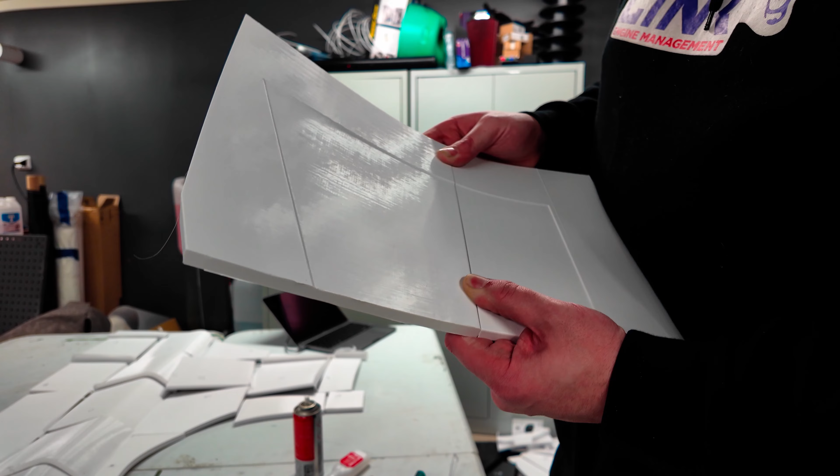So one thing that we've realized is the tolerances with the 3D printer mean we get a little bit of a raised edge on each of them. So we're going to try just rubbing it down with the orbital sander. Hopefully that's enough to flatten it out a little bit more, and then that should make these two line up just a little bit better. You can probably see there's a bit of a gap - it's the best that we can kind of get out of this kind of printer with the accuracy that it has. So yeah, we'll see how we go.

It's probably going to be impossible to see on the camera, but on this side you can see all these layer lines. We'll get it nice and close to the microphone, and here it's nice and scratchy. So then on this side where we've sanded, it no longer makes that sound - we've got it nice and smooth. It's still coarse though, so the glue will still stick, hopefully.

But yeah, let's get our first piece glued.

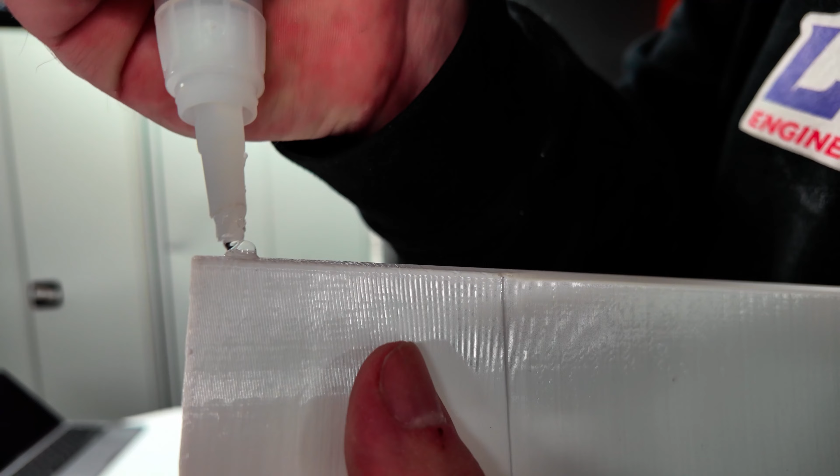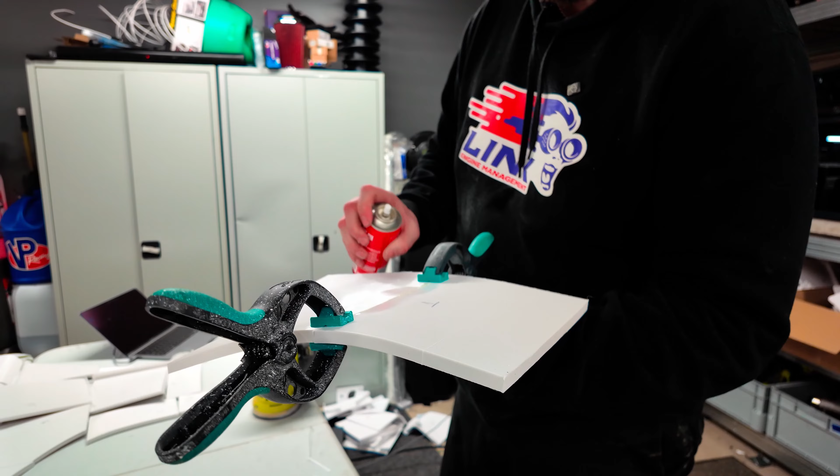Smells right. It's not exactly the best smelling stuff in the world.